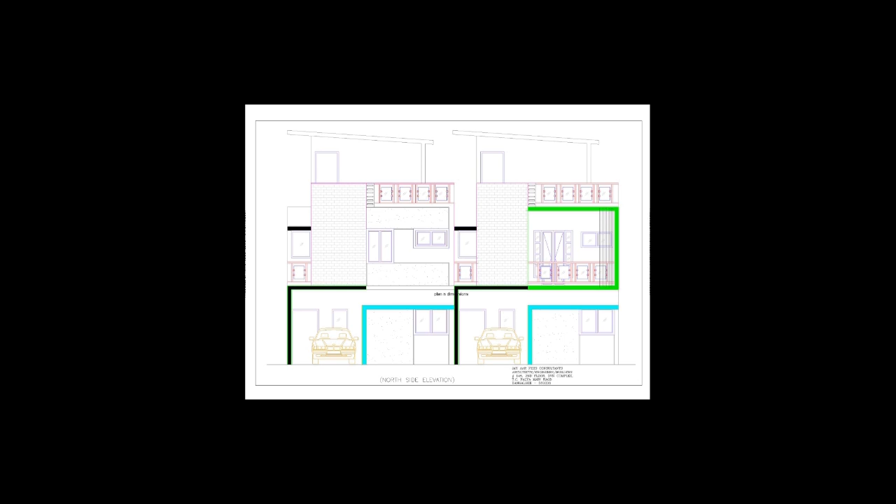Friends, today let us discuss 2 BHK duplex plan with 2D plan and elevation. At the end of this video, let us discuss 3D elevation. So please watch till the end.

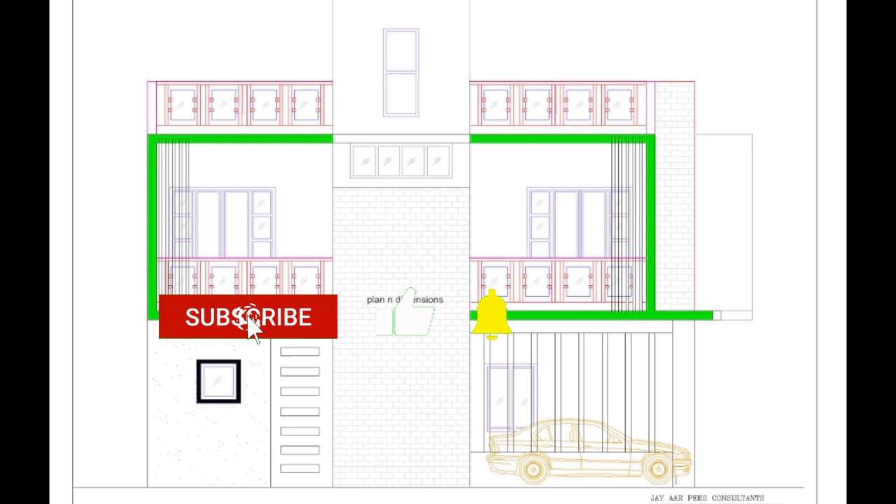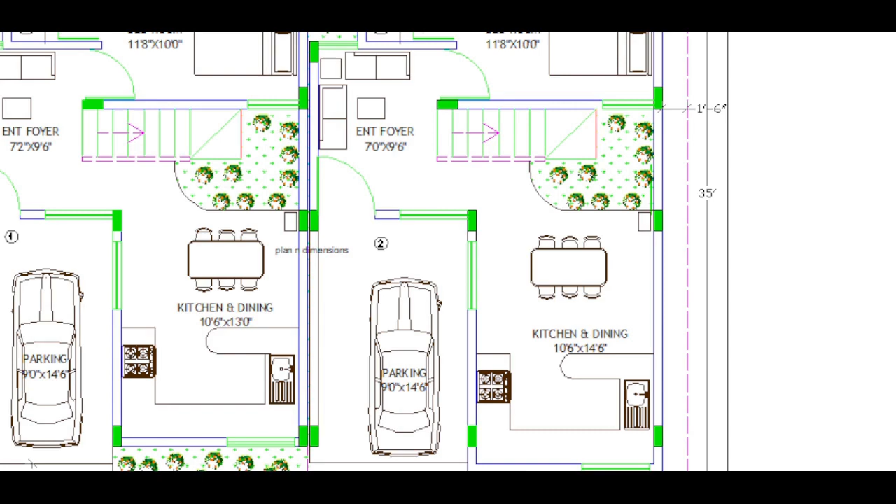Friends, this is a corner plot facing north and east, measuring 45 feet by 35 feet. This plot has been divided equally into two equal parts for two brothers, measuring 22 feet 6 inches by 35 feet.

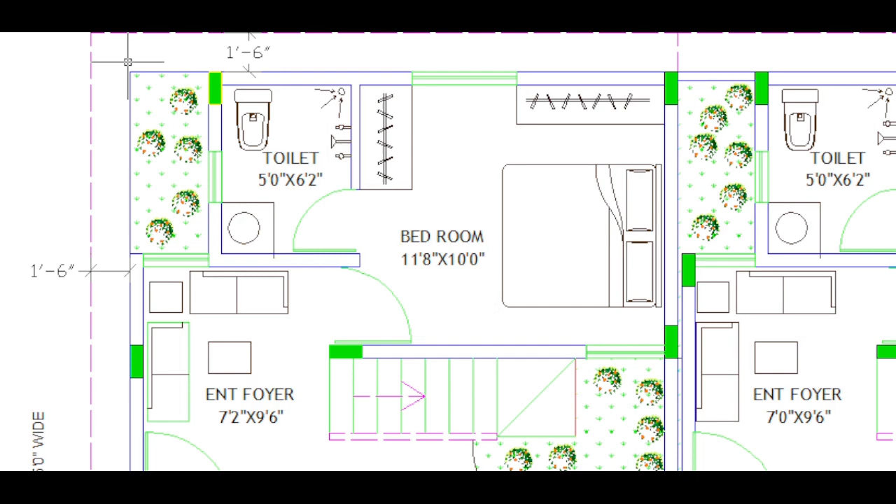First portion is facing north and east, and second portion facing north. We have 1 feet 6 inches offset all around the building. Since both plans are identical, we will discuss the first portion facing north and east.

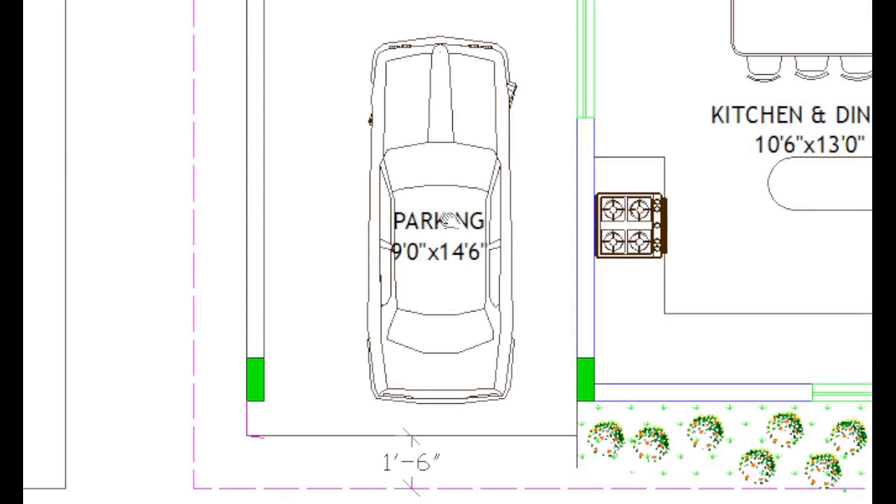For this first portion, we have main entry gate in northeast entering from north. From the main gate entry, we have porch for car parking measuring 9 feet by 14 feet 6 inches. Main door facing north.

From main door we enter foyer 7 feet 2 inches by 9 feet 6 inches with seating arrangements to entertain guests and friends.

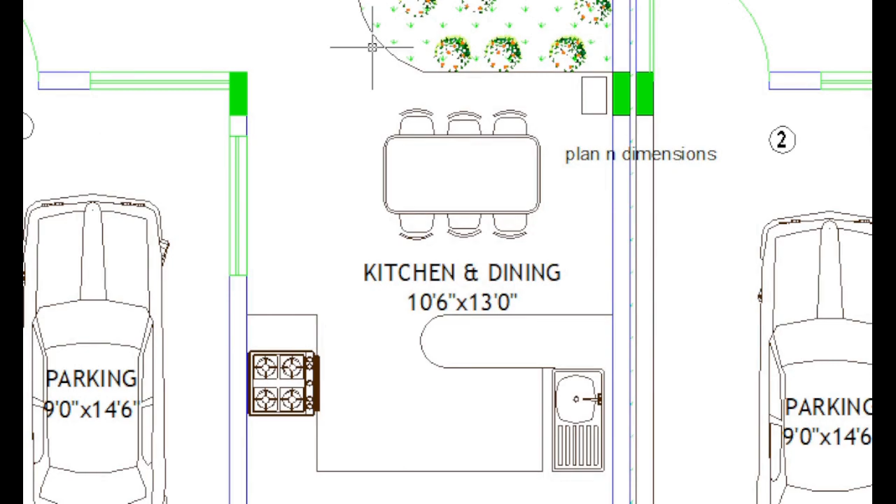Towards northwest we have open kitchen with dining measuring 10 feet 6 inches by 13 feet, accommodating kitchen platform and a 6-seater dining table. Below this stairs we have landscaping, and this portion we get light from the sky, making this entire area look very spacious.

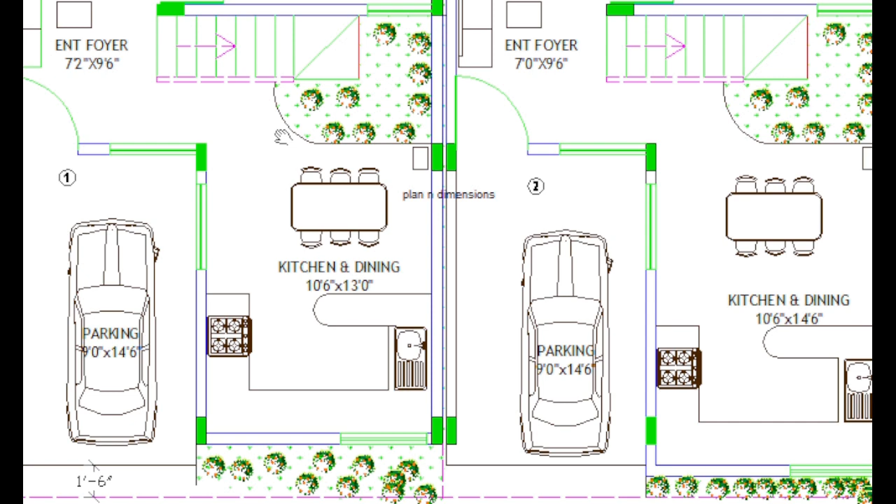Now when we move towards southwest, we have our first bedroom 11 feet 8 inches by 10 feet with attached toilet measuring 5 feet by 6 feet 2 inches, in case you find it difficult to climb the steps in future.

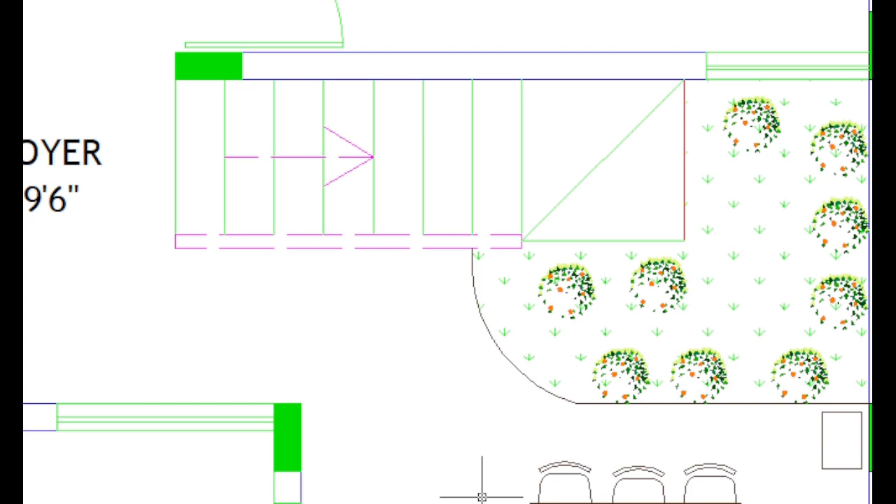From the foyer, we have stairs for upper level. From lower level, we reach here. We have a small cutout looking below our foyer.

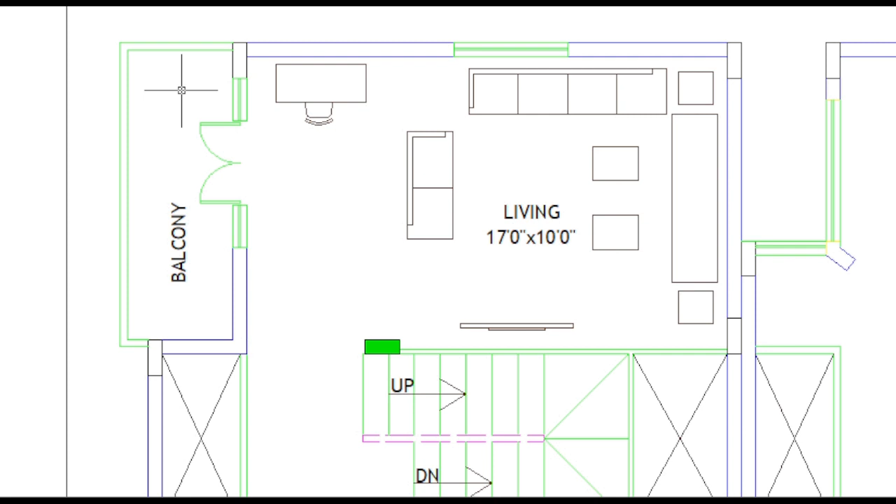Towards south, we have our family living, quite spacious, measuring 17 feet by 10 feet, can accommodate sofa, TV cabinet and a study table. For this living, we have a balcony. Now this entire area, without this wall and cutout here, looks very spacious horizontally as well as vertically.

Towards northwest, we have the second bedroom measuring 11 feet 8 inches by 13 feet with dress and attached toilet. For this bedroom too, we have a balcony.

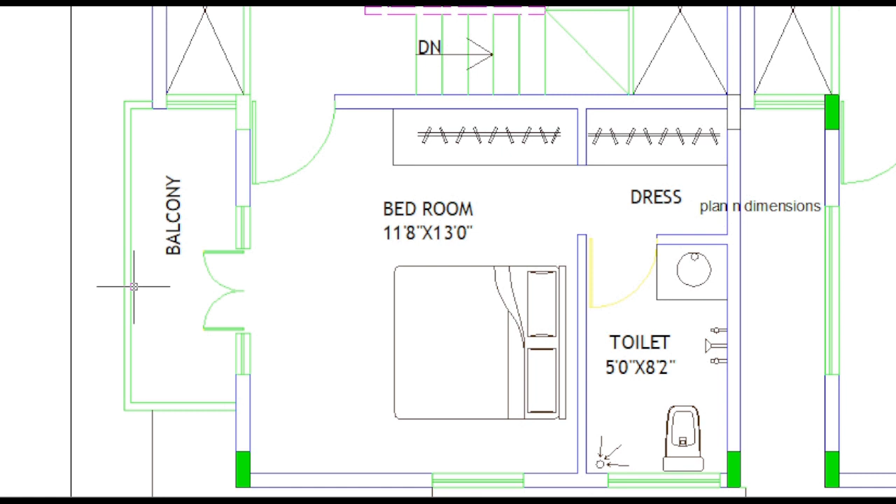Now from this stairs, we move to our terrace level with a small headroom.